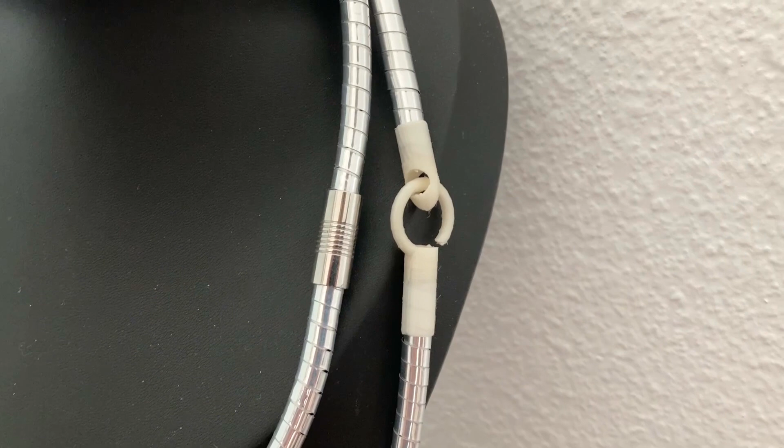In this video I will show you how to make a clasp for the necklace, designed in Tinkercad and then 3D printed. I already opened the program. It's web-based, you don't have to download anything.

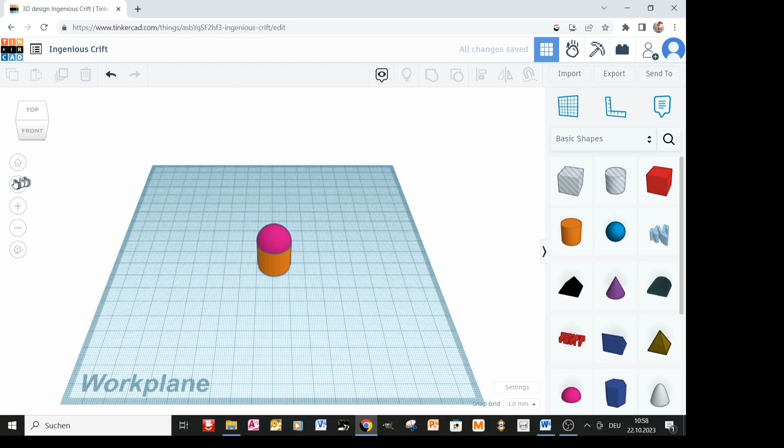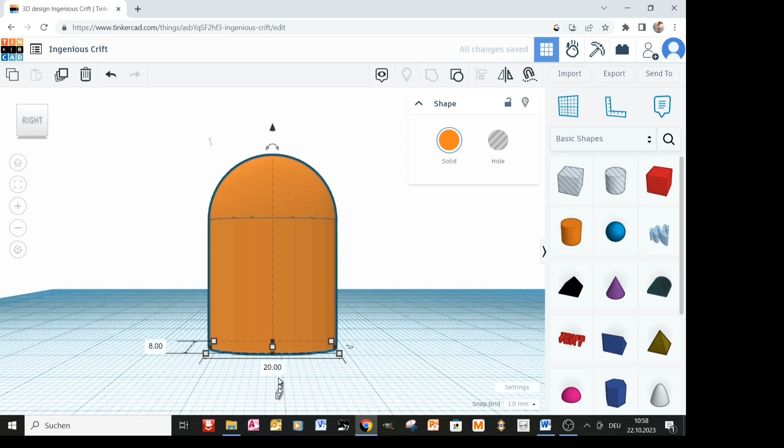I took a cylinder from the basic shapes and a half sphere. With the mouse I select both objects and go for the align tool to center both shapes, then select both and group them to make one object. Then I change the length and width to the desired dimension, and thereafter the height.

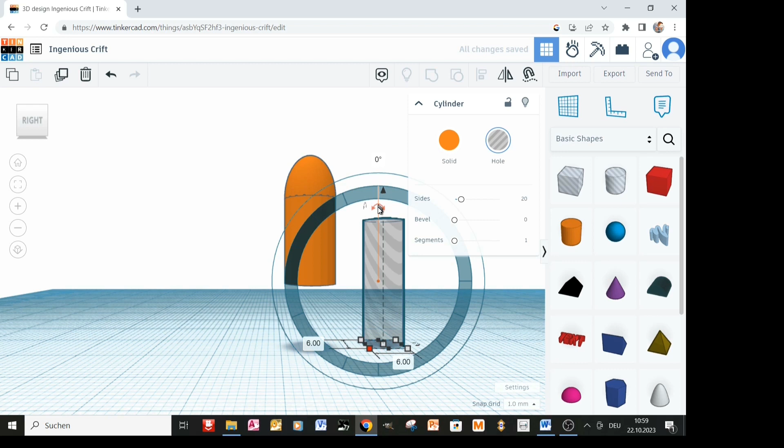Now I take another cylinder, but with the pattern gray and white. This cylinder type makes a hole when grouping with another shape. Again the dimensions are changed, and by clicking on the arrow on top I can change the angle.

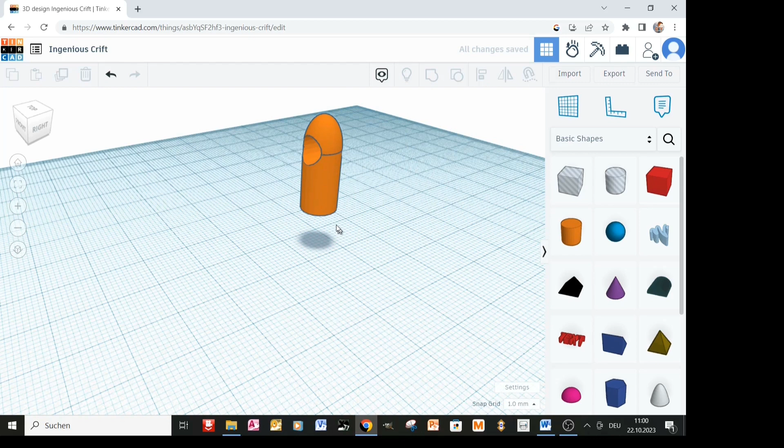Now comes the magic. Just select both objects with the mouse, then use the group tool, and you see that a hole is generated.

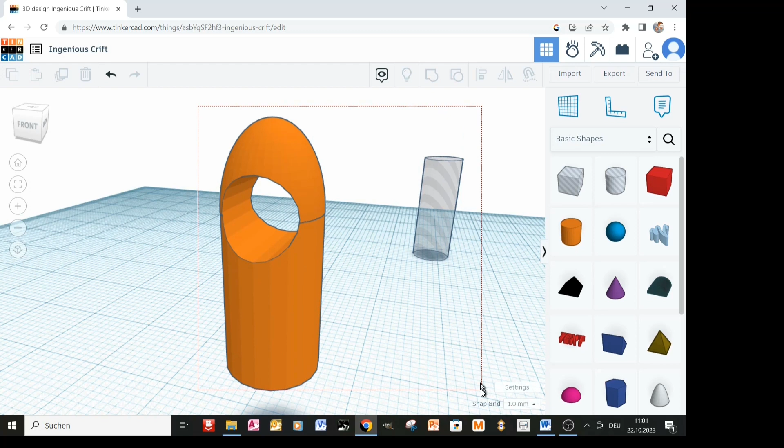Then I grab another cylinder to make a hole. The dimensions are chosen slightly smaller than the existing object in orange. Then again I choose this aligning tool that I like very much—this should be integrated in Fusion also—to align the objects. With the cube in the navigation bar I turn the object around to see that everything is nicely centered.

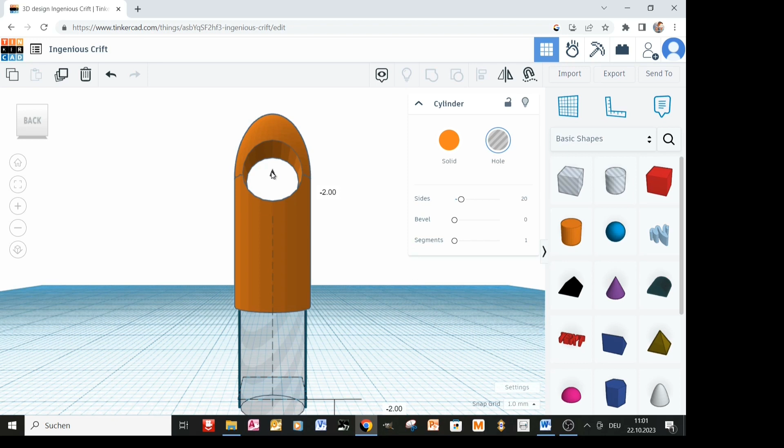By selecting the red arrow on top of the cylinder I can move it further down. Now again both objects are selected with the mouse and we group it, and we can immediately see by pressing shift and mouse that a hole was generated.

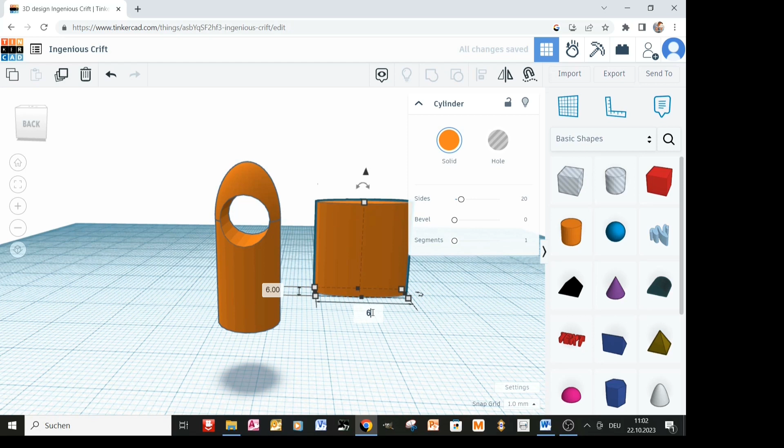We grab another cylinder and make the dimension even smaller than the hole so our soda can necklace can fit in between. We take this lovely aligning tool again, that I miss so much in Fusion, to align the objects. With shift and mouse I rotate the object to check everything is okay.

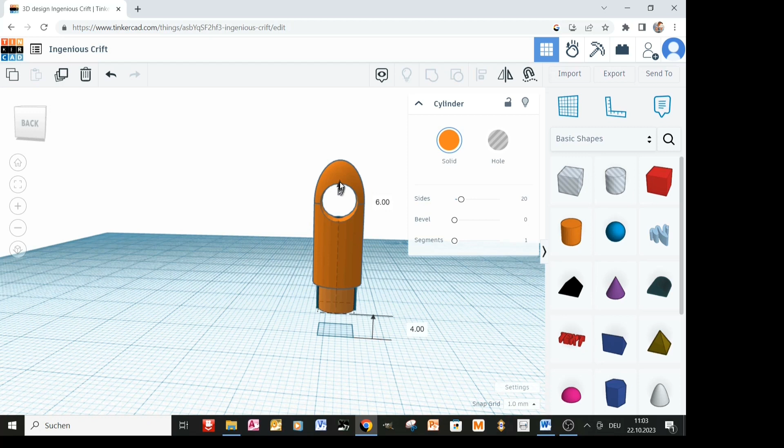By clicking on the red arrow on top of the cylinder I move it up to the correct position. Then we have a last check with mouse and shift. Everything looks fine, so we are ready to export the file to upload it in the slicer.

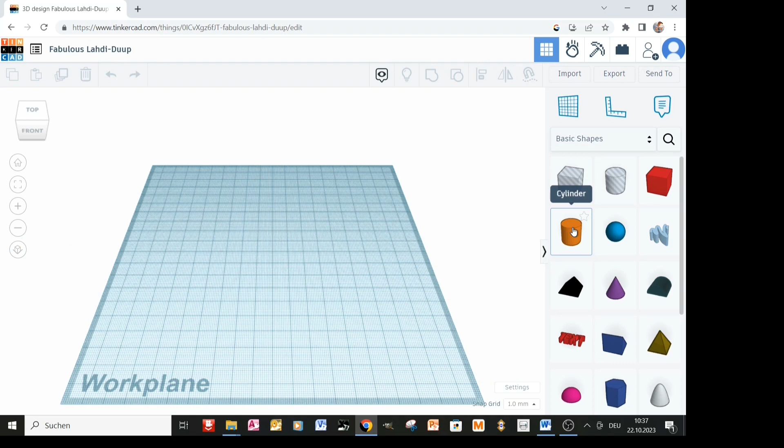But before that, we need to construct the second part of the clasp. We select the cylinder and adjust the dimensions. In the next step we would like to combine this cylinder with a ring type of shape, so we grab this blue donut.

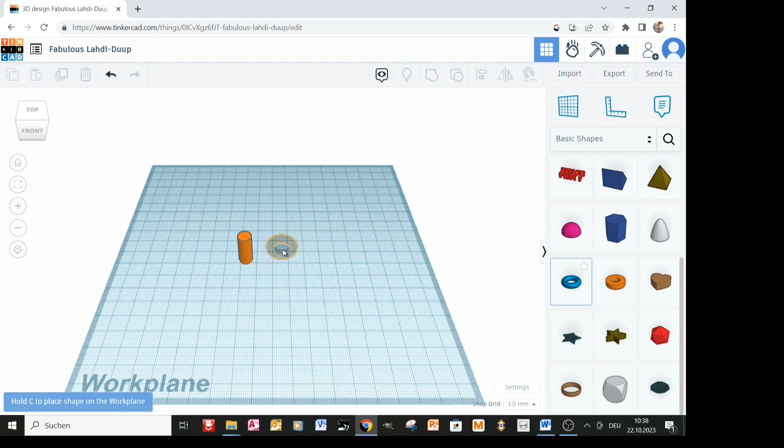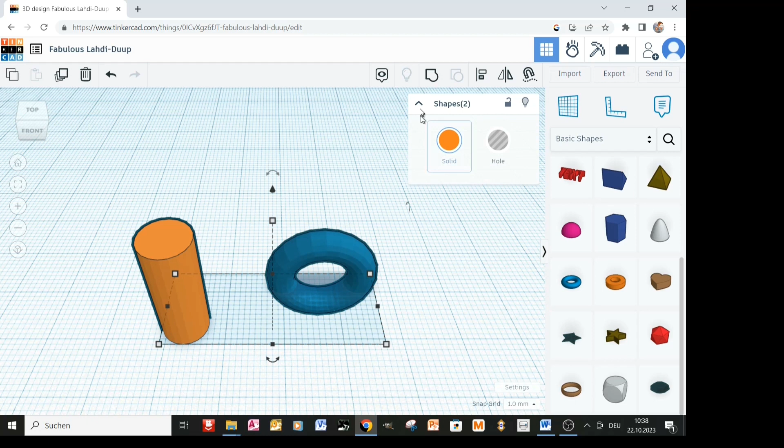Then we choose the arrows on top to change the angle. Both objects are selected and we use, again I have to say it, the lovely aligning tool. We check with the cube in the navigation bar if the aligning was good by moving the object around.

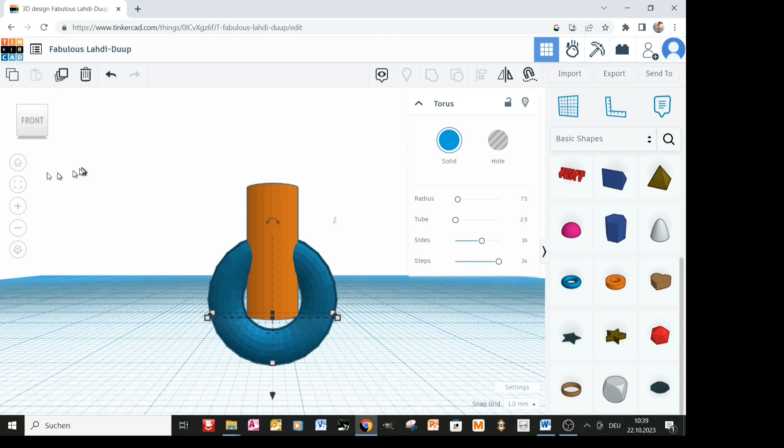Then we select the donut again and move it upwards. We click on the navigation bar to make it bigger. When clicking on the donut a menu pops up where some parameters can be adjusted, especially the donut has to become thinner.

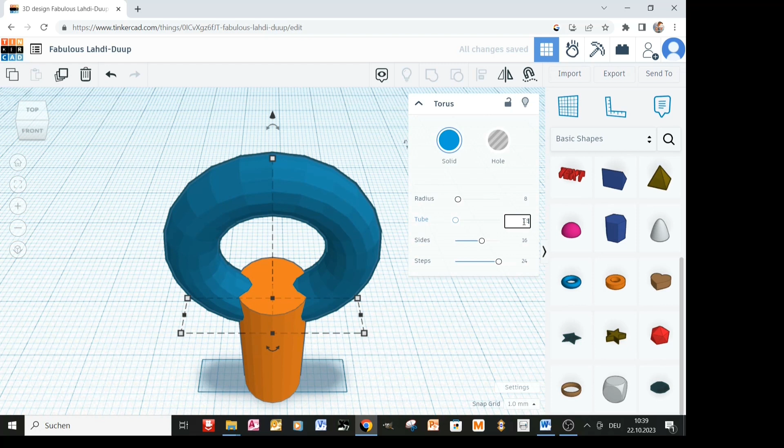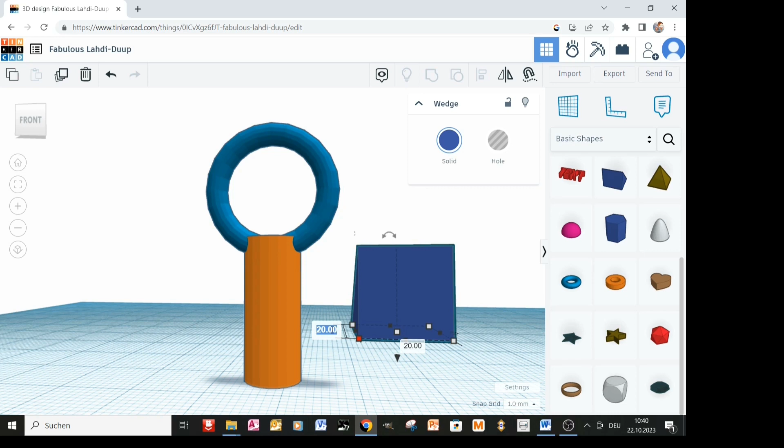Now we have to think how to make the opening into the ring. From the basic shapes I take this wedge. By clicking on the edges, options appear to adjust the dimensions, and by clicking on the curved arrows, the angle is adjusted.

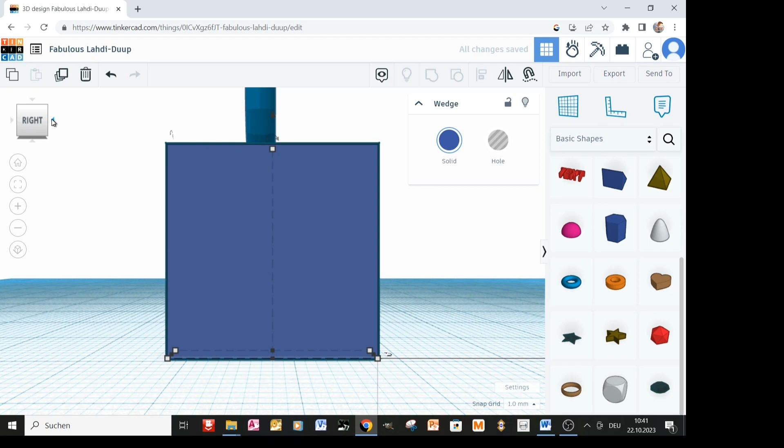Then we click into the middle of the wedge with the cursor to move it. By clicking on the arrow we adjust the angle, and then I just use the arrow key on the keyboard to correct the height.

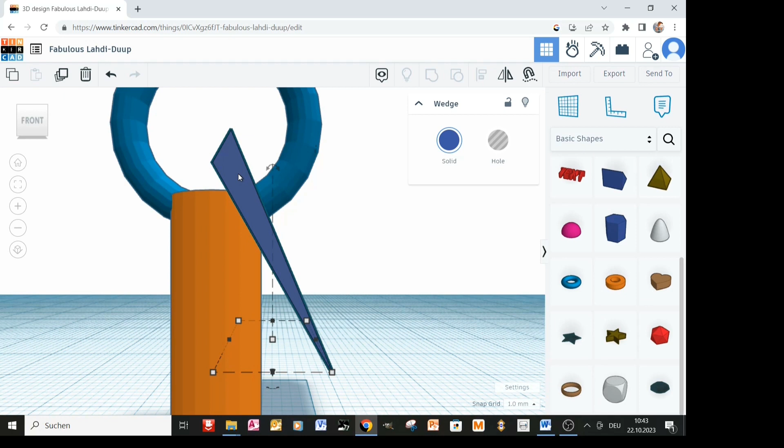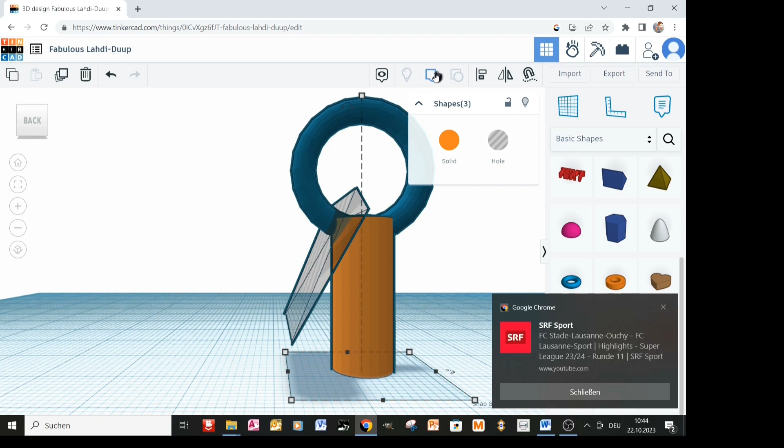When we see that the position of the wedge is correct, we have to think how to subtract it from the rest. This is done by choosing Hole in the menu for the object—you see the format of the wedge completely changed. Then we select all objects with the mouse and go for the grouping tool, and the wedge is subtracted.

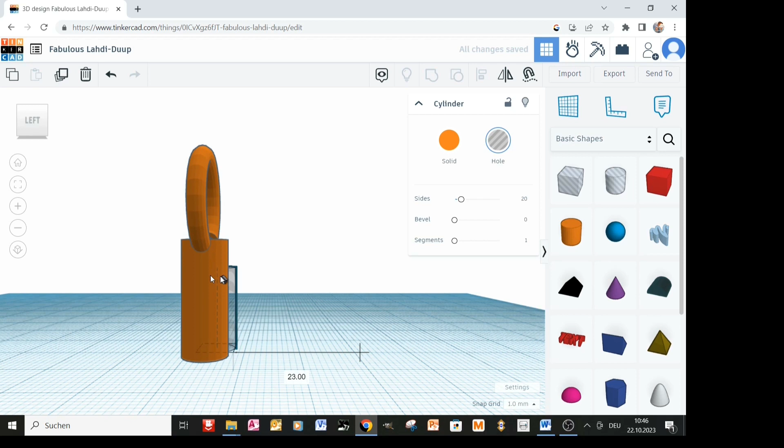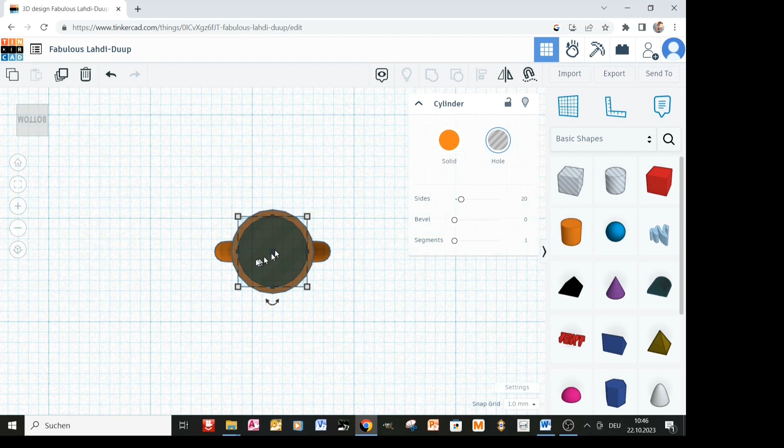To make the hole in the lower part of this piece of the clasp, we choose another cylinder and adjust the dimensions. The two objects are aligned with the aligning tool. Both objects are selected, and via grouping the hole is generated. With shift and mouse we check the position.

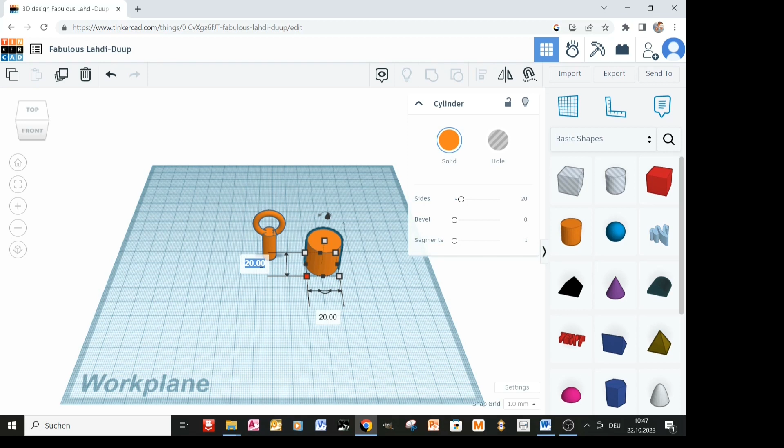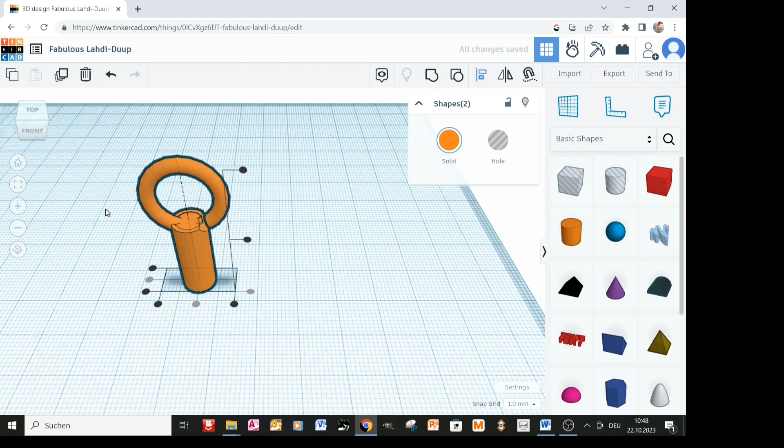Now we go for the last step. We take another cylinder and adjust the dimensions. We select both objects with the cursor and then use the lovely aligning tool. In the navigation bar we go to the Fit View to Selected Shapes button to have a better view, then activate the upper red arrow and move the cylinder into the correct position.

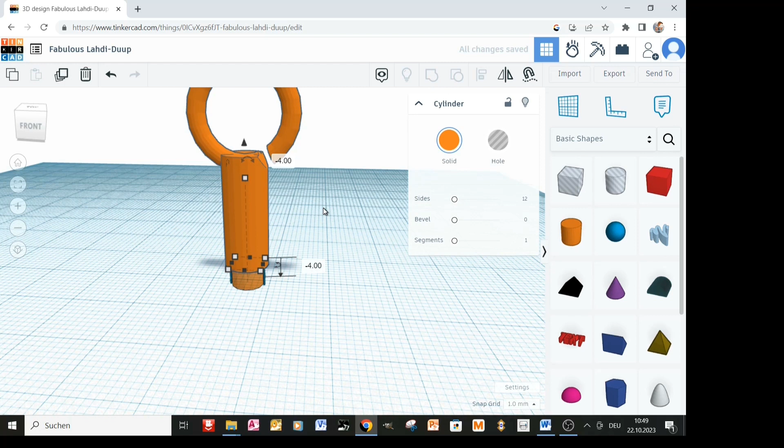Then we grab both objects and group it to make one object out of it. We check the final design with shift and mouse and go for the export.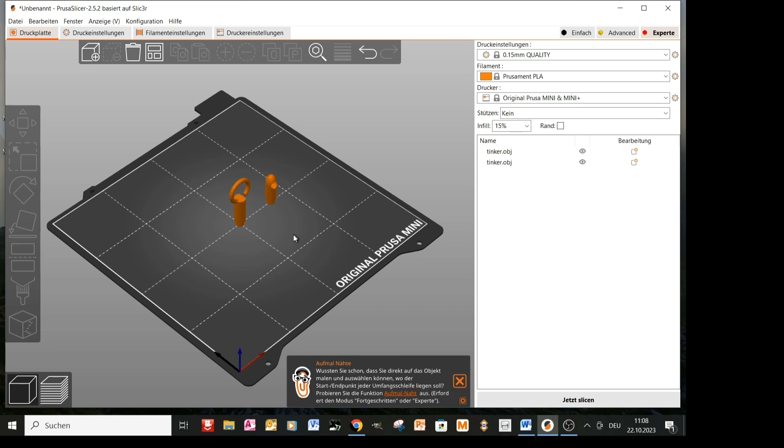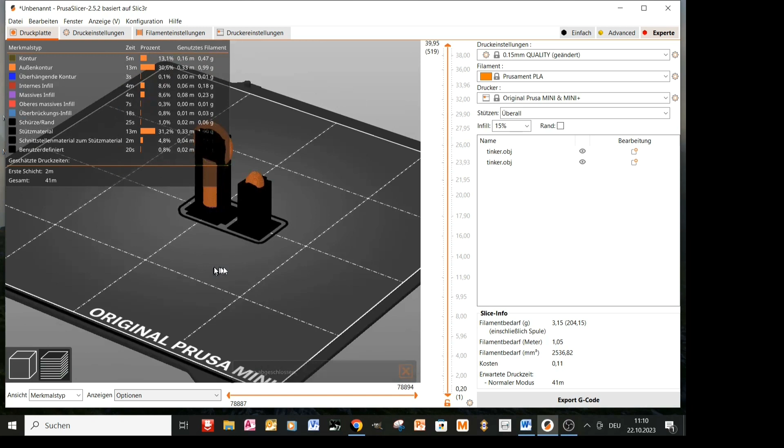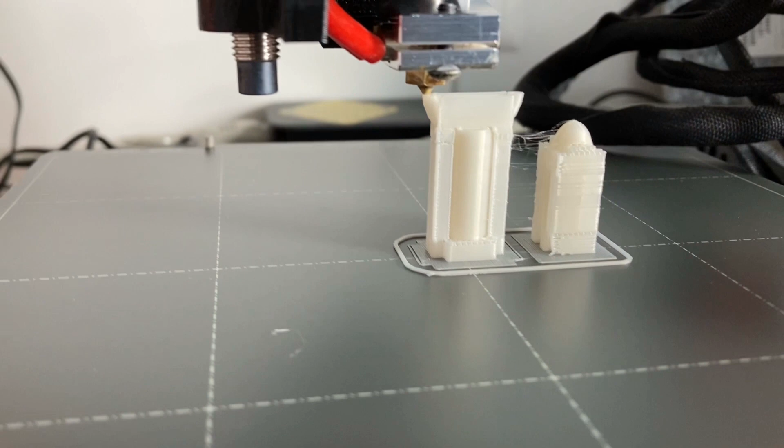I use here the PrusaSlicer program. As the objects are very thin, I use for supports the everywhere option. You see here in black the support structure, and in orange the true objects I really want to print. Then I maneuver through all the layers to check how it looks, export the G-code to the USB stick and upload it to my lovely Prusa Mini.

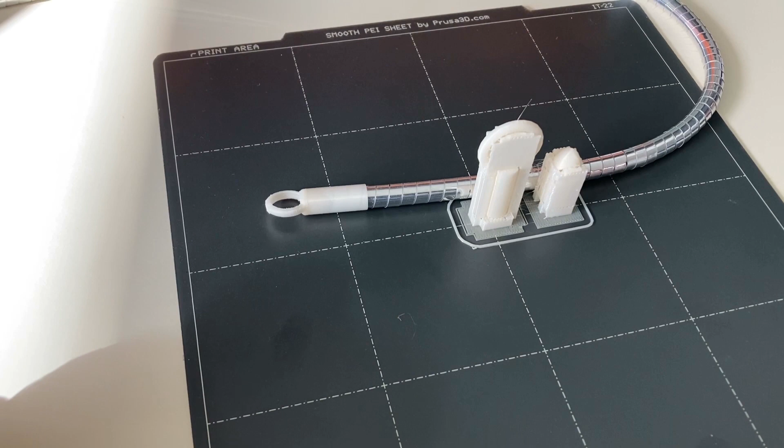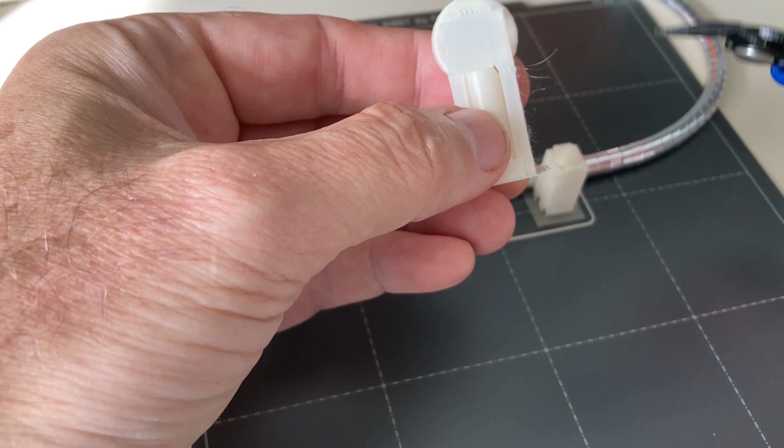Everything is printed, and now we have to release it from the plate. Then I start carefully removing the support structures.

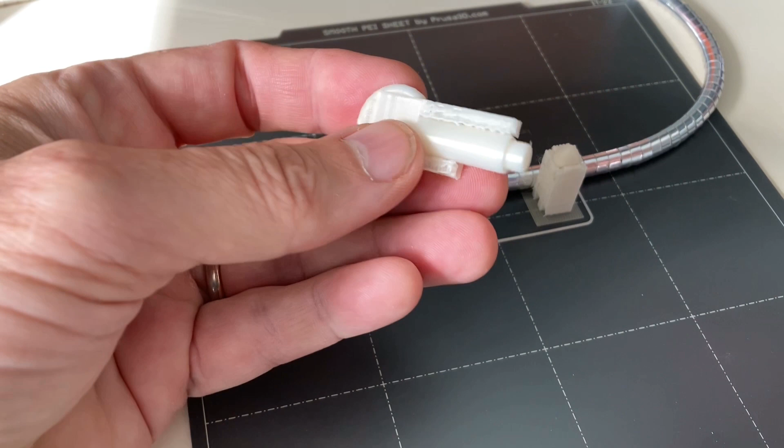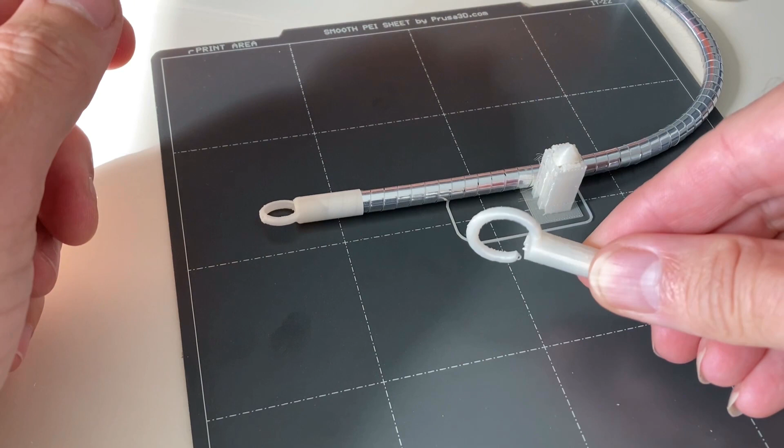And of course there is still a lot of debris around the clasp, and the color doesn't look that nice. It was the only filament I had left, but it was just to show you the entire process, from starting designing something in Tinkercad until you have it in hand.

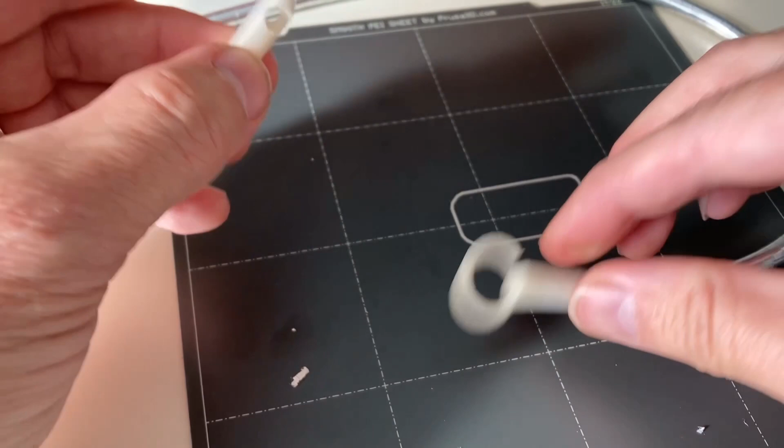Here you see how to fix the soda can necklace on the first part of the clasp. The process is repeated with the second part. And now, last but not least, you can see how the two parts of the clasp are joined together.